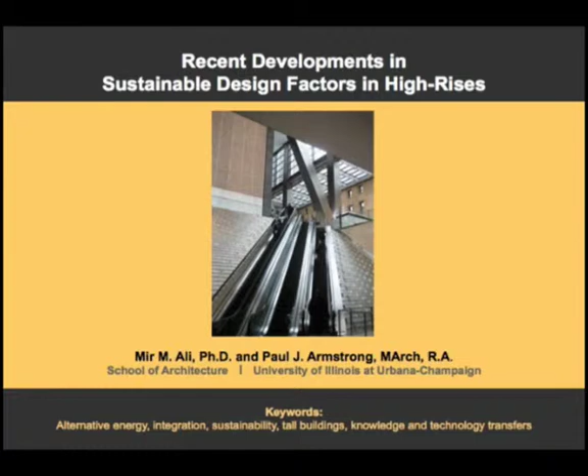The topic of our presentation is recent developments in sustainable design factors in high-rises, which is basically an overview of sustainable tall buildings. We have introduced a number of ideas and concepts, and at the end we will present some case study examples.

By the year 2030, about 5 billion people will live in urban areas, according to the United Nations, and 60% of world population will live in urban areas. That tells us that there will be a dire need of building more tall buildings, because land is very expensive, and we don't want to expand horizontally because that creates other problems. So it will be inevitable to build new tall buildings, even though some people don't like it.

The issues to address will be the energy needs, global warming, pollution, urban sprawl, water shortage, and of course global conflict, because when there are too many people, there are many social and economic and other problems that automatically crop up.

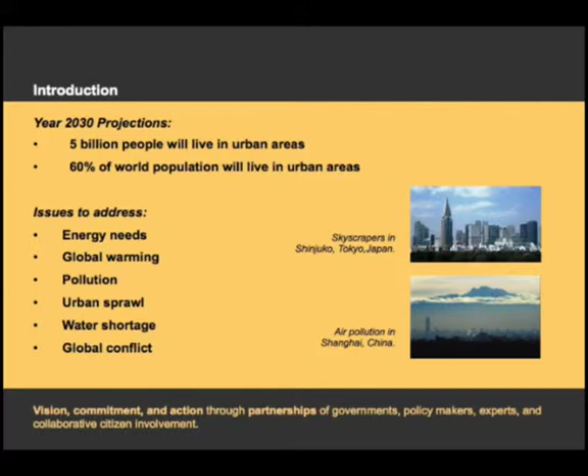Here is a brief history of sustainability. It actually started, the way we know it, in the early 20th century, although even before that, people always by instinct would follow the ideas of sustainability to have a comfortable living in whatever way they could. But as we know it, the agricultural and forestry theories started this - people in agriculture thought about sustainable yield and renewable resource management. Then, of course, architecture also jumped into the bandwagon to celebrate industry and technology, and something called vernacular architecture, which is very local type of architecture and design, has a lot to do with sustainability.

Then the 1973 energy crisis after the oil embargo also, I think, prompted what we have witnessed in the recent past. The solar architecture was a slogan at that time, but then after some time it sort of died down temporarily, and again it came back in 1989 after a report known as the Brundtland Report, Our Common Future, published by WCED. This was reinforced by the Earth Summit at Rio de Janeiro, held in 1992.

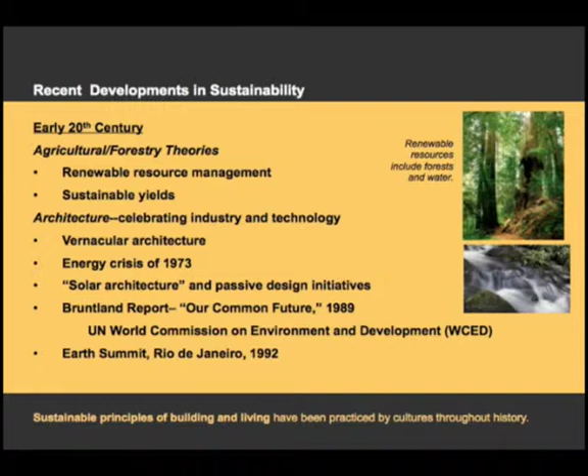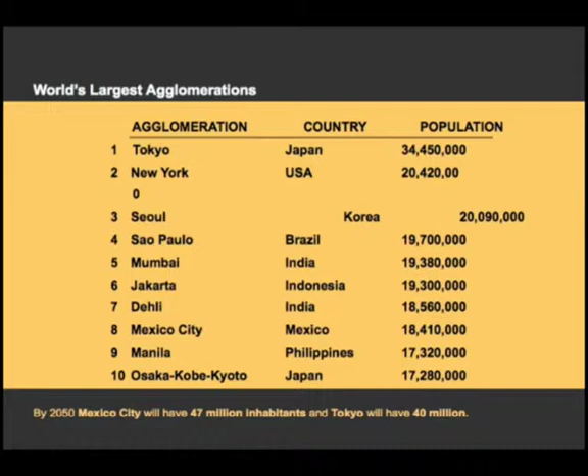You can see the situation that's going on right now. These are the population figures of the various cities, and there are more - we just listed 10 of them. You can see Tokyo starts with about 35 million, and then New York, Seoul, Sao Paulo, Mumbai, and so on and so forth.

And it will only get worse because people move from rural areas to the cities, and of course in the developing countries, mostly in the developing countries, population is increasing at a very dramatic rate.

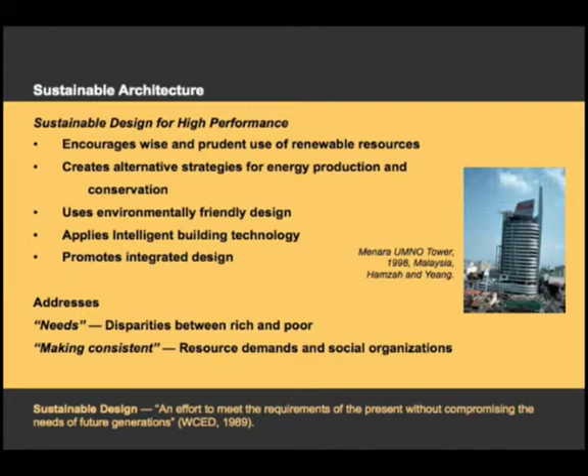Sustainable design for high performance encourages wise and prudent use of renewable resources, creates alternative strategies for energy production and conservation, uses environmentally friendly design, applies intelligent building technology, and promotes integrated design. So when we talk about sustainability, particularly in the context of tall buildings, there are quite a few issues, and you can see we are adding this intelligent building technology, which is very much needed, and of course integrated design.

Integrated design is really a good part of sustainability, because if we want to make a very complex system like a tall building sustainable, then integration of the systems in a very effective and efficient way is of utmost importance. The concept of sustainability emanates from economic development, environmental protection, social justice and diversity, and consistent resource demands of technology and social organization.

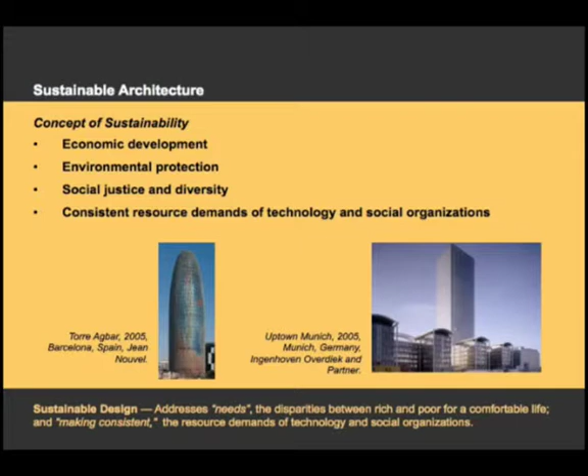Now, what is a high-performance tall building? These tall buildings optimize energy usage, structural materials performance, and environmental and interference effects. The goals are increased energy efficiency, comfortable, safe, and enjoyable work environments, and easy maintenance within a reasonable budget.

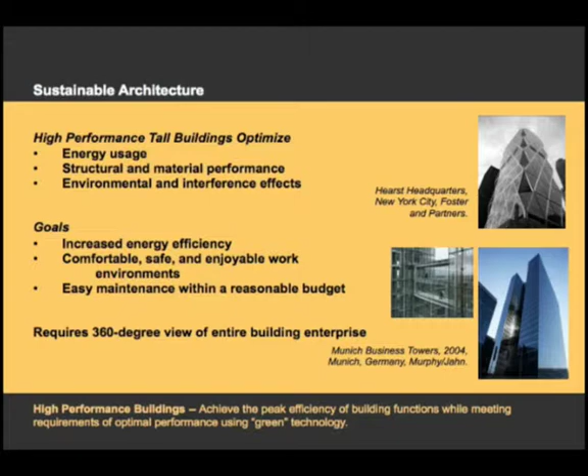There are three things that go hand in hand, and sometimes we get mixed up. This is under the broad category of sustainable design or green design, and these are basically the high performance tall buildings. Then another category is carbon neutral buildings, and of course we have zero energy buildings. Sometimes these are different categories, we use these names, but they are not totally mutually exclusive, and they fall under the broad definition of green design.

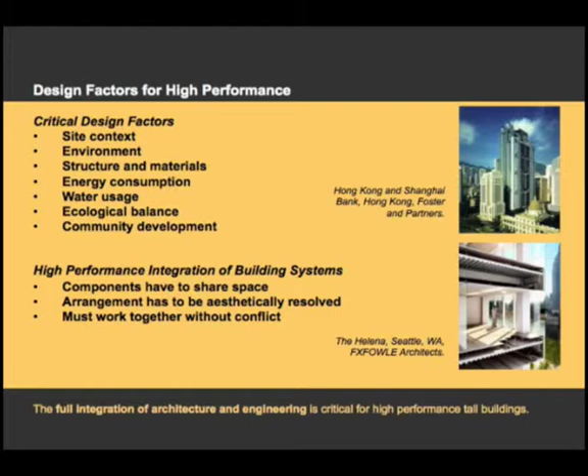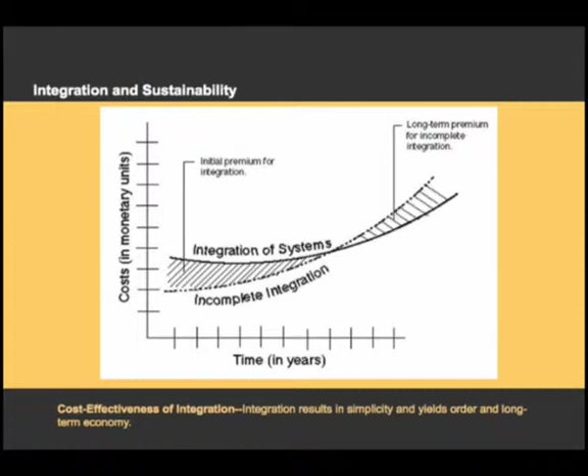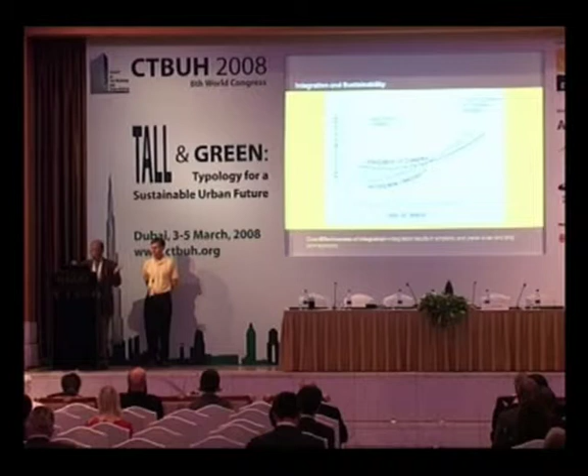Therefore, we really need a completely global view of things. Now, when we talk about integration, there is some high initial cost to integrate, and it's very hard to measure. I talked with many people personally who have dealt with these issues, and nobody can give an exact figure. Some even said that if you do a sustainable design smartly, using passive techniques, the cost may be lower than a regular building. I even heard that, but others say it is 1 to 2%, but we believe it's a range. It can go as high as 10%, it could be 5%, and so on, depending on what we are integrating.

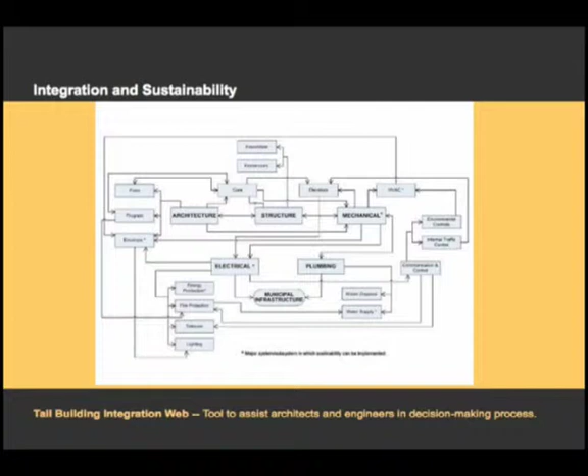Now, we developed a sort of integration web that shows the interrelationships of all the subsystems in the building. There are some major systems like architecture, mechanical, structure, plumbing, electrical, and there are some subsystems, and we are showing through this diagram the interrelationship, which is really very complicated. We got this idea from the food web in a way, and also we looked at some integration charts of aircraft structures, which are extremely complicated.

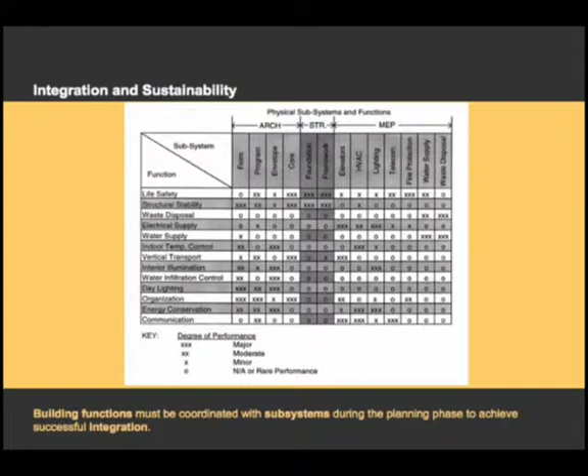This shows in a tabular form the same kind of thing. I'm not going to go into detail because of time. So here we have presented those in a very tabular form, and we emphasize integration for sustainable buildings, because integration is one of the key factors that makes a building really efficient and sustainable.

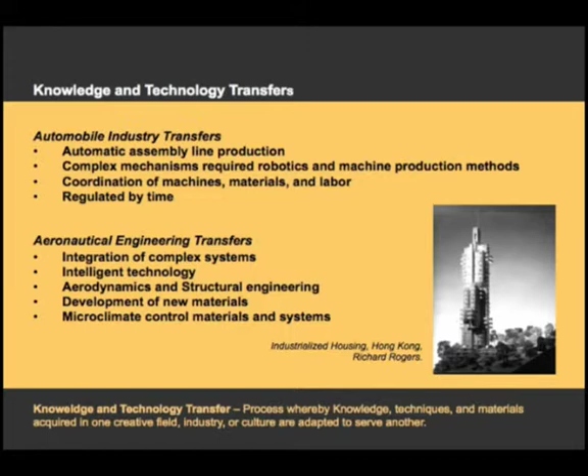Now, knowledge and technology transfers - basically we can learn from other industries like the automobile industry and also the aeronautical industry, and even the space industry, but that's a bit too far maybe. The aeronautical engineering and automobile industry give us some decent ideas about how we can use some of the information. They may not have exact similarity, one-to-one correspondence, but we can somehow learn from those and apply to tall buildings, because tall buildings are a very complex system, and they are also multidisciplinary and so on.

Now, the LEED rating system has this evaluation criteria, and most of you know about this, so I don't have to go through the details. Now, what are the strategies for achieving sustainability?

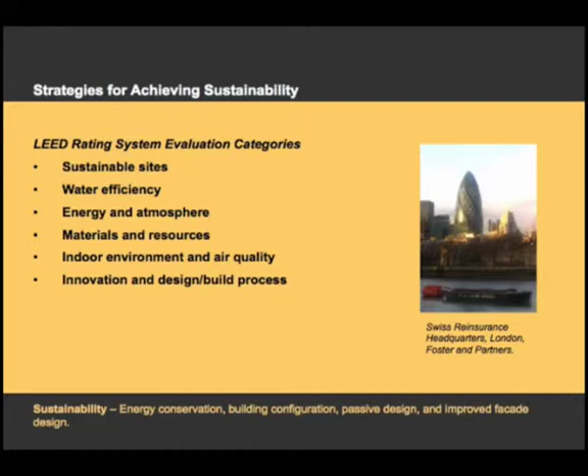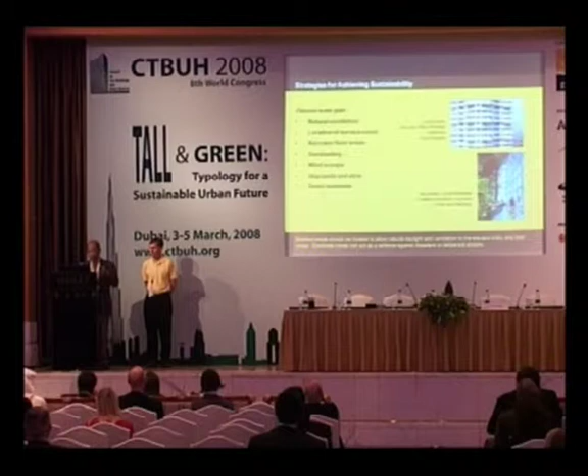If I can go back, something that we didn't see in this list is the emphasis on ecological sustainability and also community development. I think these are areas that need to be looked at a bit more closely because they are very important. Community development is related to the social aspect, and ecology is of course very important, but we need some sort of more explicit inclusion of those ideas.

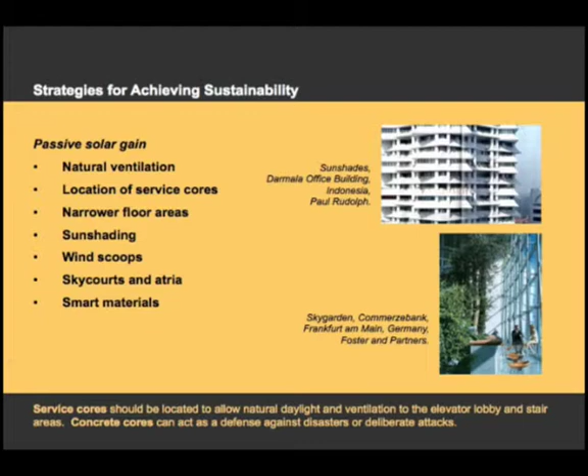Strategies for achieving sustainability - of course we can use passive solar gain, and there are different techniques here. You will also find it in the paper, so I don't want to go through everything because of time. We have a limited amount of time, but passive solar gain is a very important component of sustainability. Now, structural materials - when we say high performance building, we are also dealing with safety.

People should be safe inside, and the structural performance and the material performance should be at their peak. So the core is an important element in the building which deals with structural stability. We often use the core for structural lateral load resistance, and then of course it deals with all the mechanical systems, elevators and all that. So it's a kind of hub of integration, where much of the integration takes place, and we can make a building sustainable if we pay a lot of attention during the design process about the core.

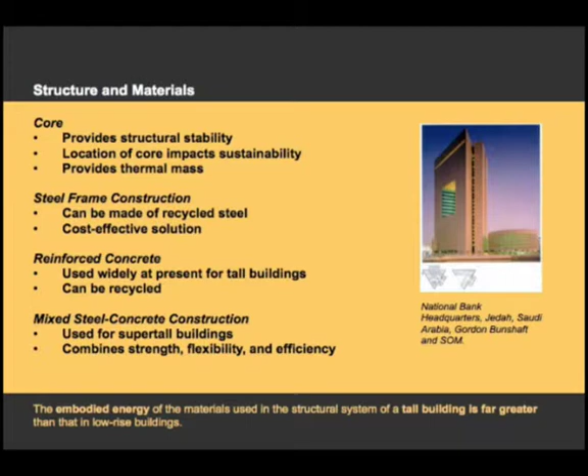And of course, mixed steel concrete construction is more popular these days because we get the advantage from both steel and concrete in this type of construction.

Smart materials and nanotechnology. Side by side with sustainability, this is also another aspect, the smart materials, because we use all these smart materials and sensors and many high-tech concepts to come up with a sustainable building design. And these are some of the items that we have listed.

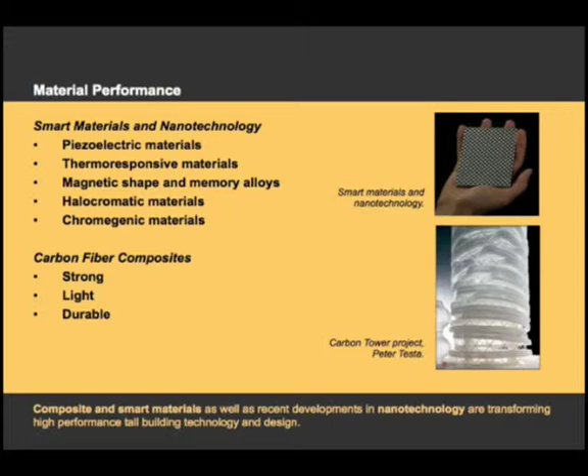And then of course the carbon fiber application has already been introduced into the aircraft industry, and there are some positive and negative sides of it. Peter Testa, who is an architect on the West Coast, designed a visionary project which is a 40-story carbon tower. You can see how it is, but real application of this using carbon fiber in a building is probably decades away because of the cost involved, and there are some negative aspects of it, even though it uses nanotechnology.

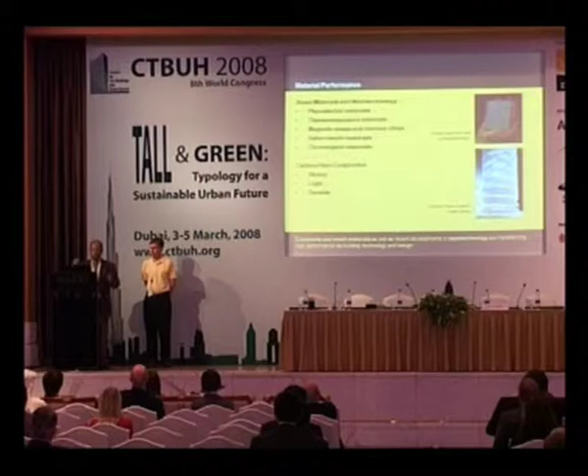I did some research on that, and we found that carbon fibers tend to be a brittle material, which is not always good for buildings. We need more ductility and deformability in buildings.

And then facade technology is another aspect of sustainability, designing facades, and again this is another place where integration becomes important. The ventilation, mechanical system, and rain screen principle, all these things come together, and solar panels these days we can use the facade for, which will in a way serve two purposes.

So facade technology is gaining a lot of attention these days, and we use a lot of shading and these kinds of devices, and how to avoid glare, how to use sensors so that when the sunlight is very bright, it will automatically become dim and people from inside would not get the glare, things like that.

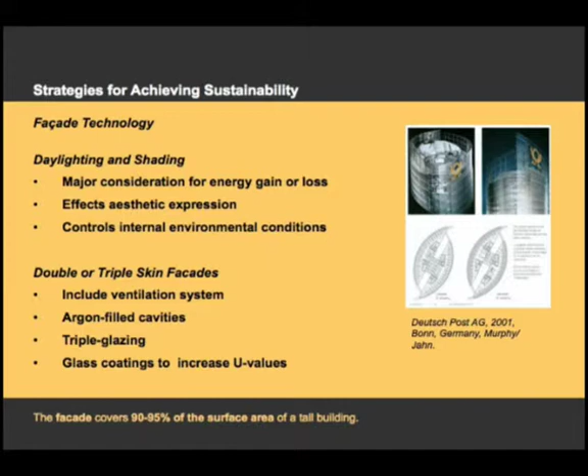And then of course there are other aspects. We can use it for aesthetic expression, and then it controls the environmental conditions. There are double or triple skin facades these days which are used to create ventilation, create pressurization within the space, and that inert space is sometimes filled up with argon, and it gives us a lot of energy saving and ventilation and comfort in the building.

Harnessing solar and wind energy. I think you all know about solar panels and solar cells, and it's not cost effective, but it's gaining more and more popularity these days.

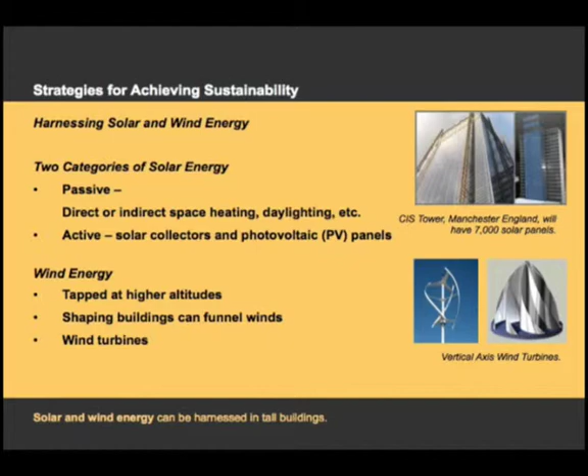And then of course wind energy is another thing, and for tall buildings both of these are good because tall buildings shoot up above the natural landscape quite a bit, and can get plenty of sunlight, and also plenty of wind when there is high wind. So there is great potential for that, but again there are negative aspects of it, cost, and for the wind turbines, vibration and noise, those things have to be also considered.

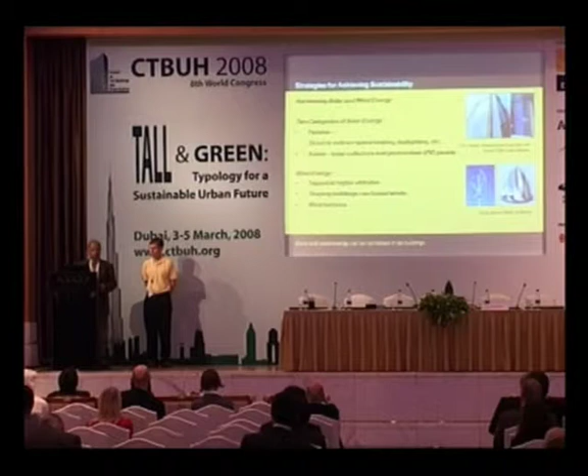But a lot of research is going on, and there are all kinds of turbines now, vertical axis turbines, horizontal axis turbines, and all these things. So these things are becoming popular.

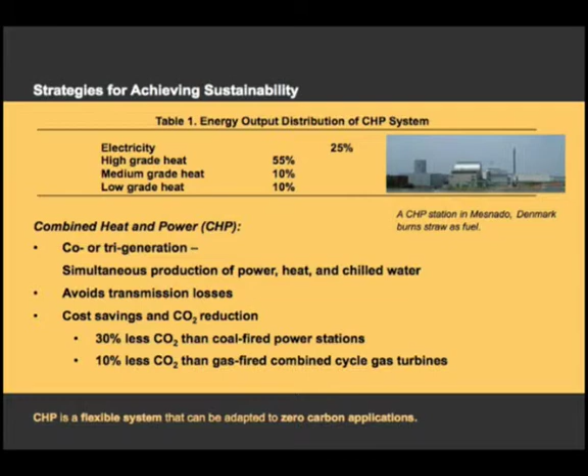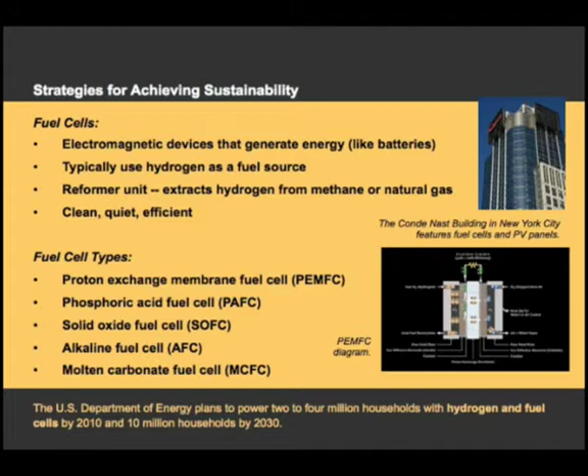Fuel cells are another important element, used for many other applications in airplanes and spacecraft, and now in tall buildings. These are very neat because this is a clean, carbon neutral system that doesn't emit carbon dioxide or greenhouse gases, and it's very simple in concept. Basically they use a reformation unit that uses methane and changes it to hydrogen as a fuel source.

The hydrogen fuel eventually gets into the fuel cell where there's a chemical reaction, an electrochemical reaction that generates electricity. This is quite efficient, somewhat prohibitive in cost these days, but it's getting more and more affordable. These are different types of fuel cells.

Other strategies include efficient elevators. These days, efficient destination-oriented elevators are being used. And then there's biomass energy, geothermal energy—I heard the rain already, so I have to move on fast.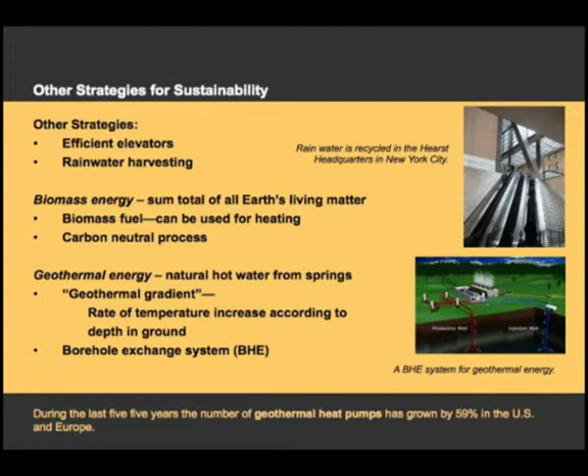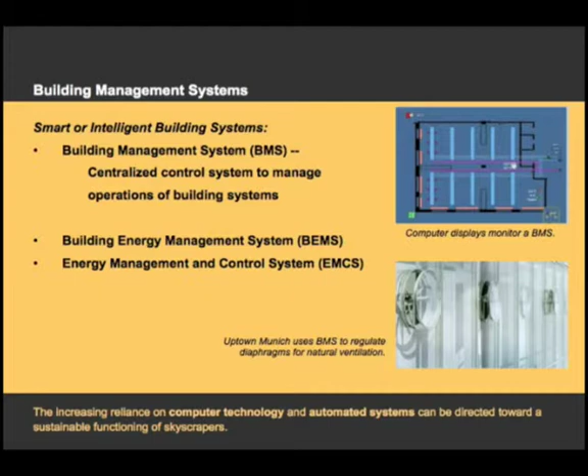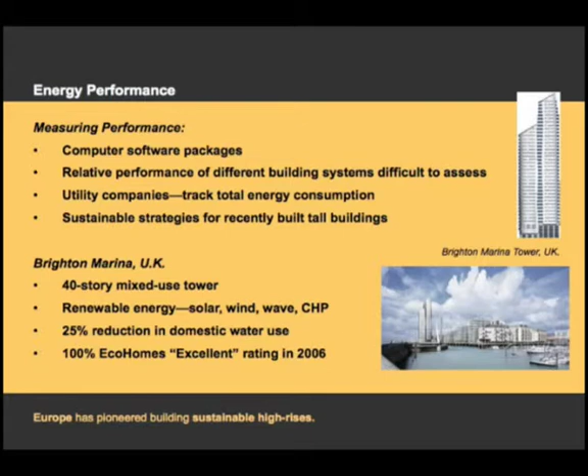Intelligent building systems are controlled by the building management system, of which BEMS is a component. How we measure performance is a big question. We can talk about sustainability, but many of these buildings are new or recent, so nobody knows how they'll perform—we have to watch and see. There are also issues of monitoring, and they aren't always easy for various reasons.

Here we are listing some buildings in Europe, and some case studies. The Menara Mesiniaga is a bioclimatic design by Ken Yeang, which is another aspect of sustainability.

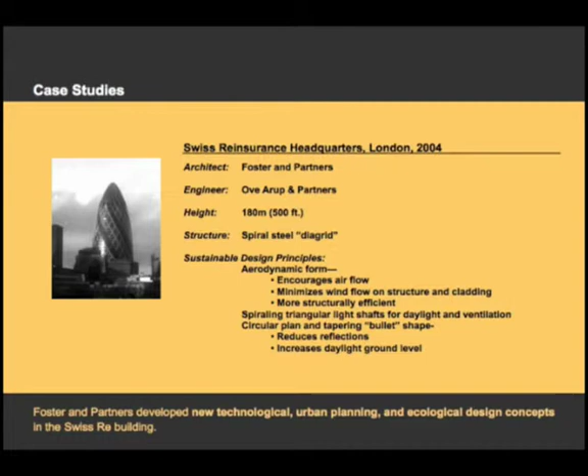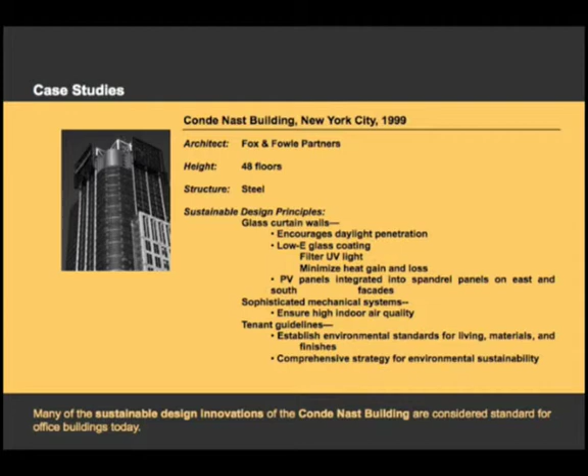The Swiss Re building in London depends on aerodynamic form and many other concepts, which you'll find in our paper. It has a diagrid facade. Then there's the Condé Nast building, the very first sustainable or high-performance building in the United States—it's very efficient and good, but again we have to wait and see how it performs in the long run.

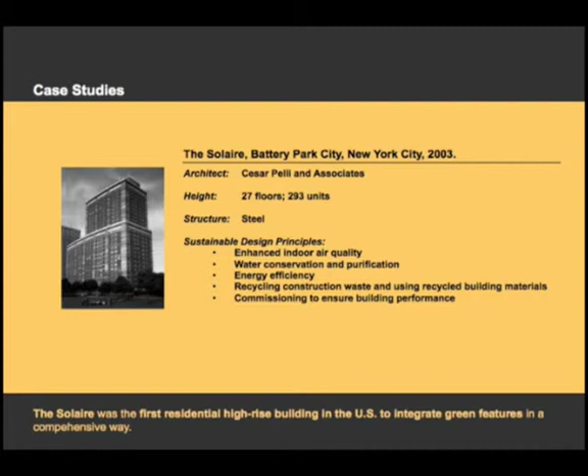Here is another apartment building in New York City called the Solaire, and another recent one is the Helena, also a high-performance building in New York. These are some of the examples, and you've probably seen this before.

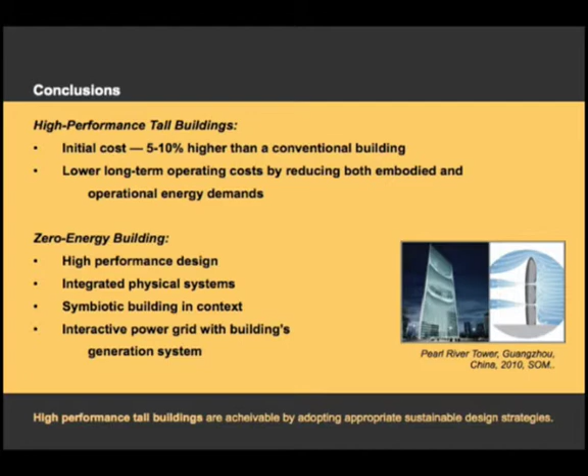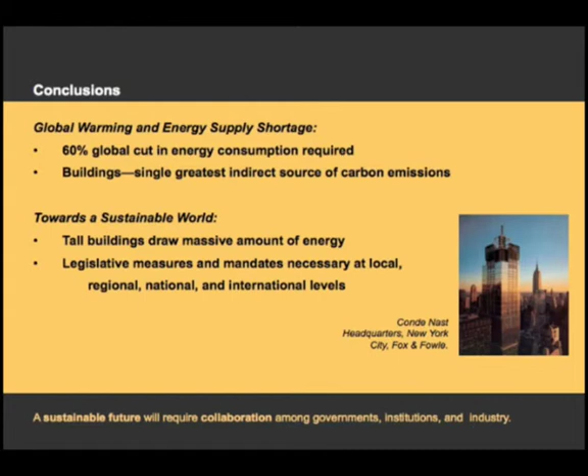We need a 60% global cut in energy consumption, and buildings are the single greatest indirect source of carbon emissions—someone said it's about 40% or so. Towards a sustainable world, these are the last words: tall buildings draw a massive amount of energy, and legislative measures and mandates are necessary at local, regional, national, and international levels. There are issues like credits and incentives, but in our opinion more mandatory requirements should be introduced. Thank you very much for your attention.